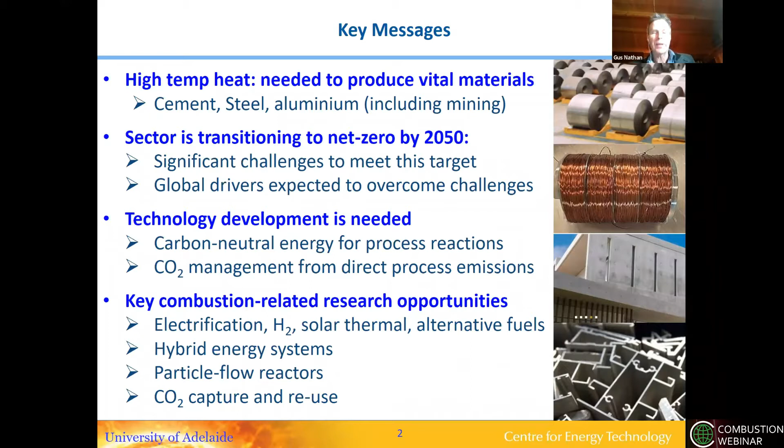So a bit about some of the global drivers. This is a recent report from the International Energy Agency showing the global share of different key sectors in global CO2 over the next 50 odd years. The electricity sector is broadly anticipated to decarbonise first, then the transport sector, shown in orange, next.

Industry processes are anticipated to be the slowest to decarbonise for a whole host of reasons, including being capital intensive and trade exposed, but also because there aren't clear commercial technologies available on the horizon yet, well demonstrated. This illustrates that 32% corresponds to the industrial sector, and of that, about three quarters of the demand is for heat.

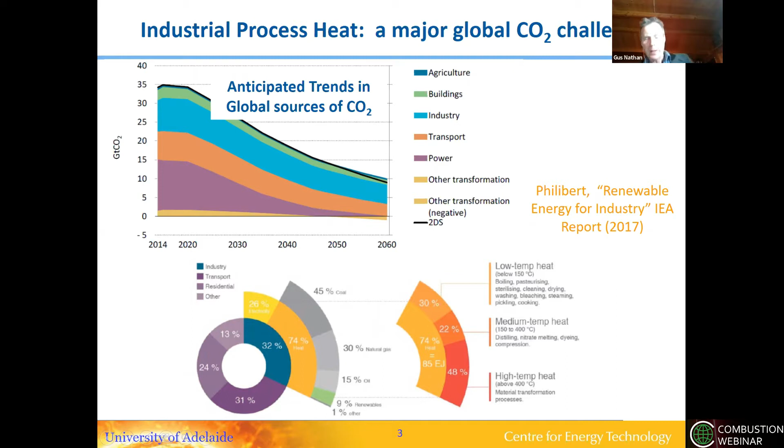Of that heat demand, about half is high temperature and half medium to low temperature. There are a number of other studies, including a different one published in Science, showing some of the key sectors attributed as being difficult to abate. These include things like iron and steel and cement, as well as other widely studied areas such as aviation fuels and the like.

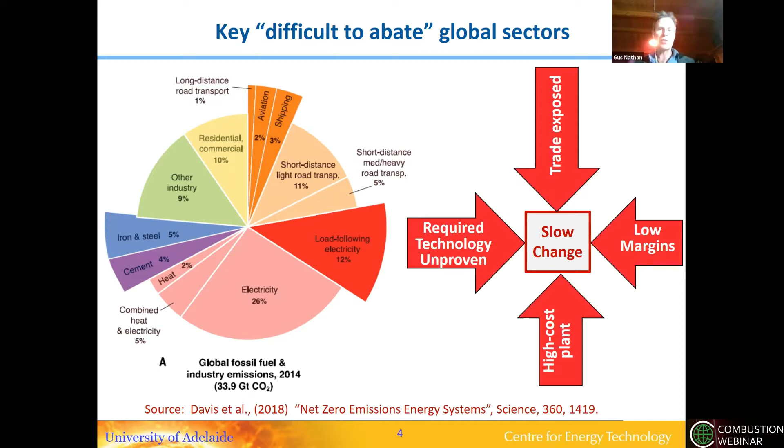Cement here is shown as being 4%, but if you include lime as an industrial chemical, this is often buried in many of these other processes. Overall, some studies put it between 7% or so, and iron and steel as much as 7 or 8%, depending on which studies you look at. These are some of the reasons why they're considered difficult to abate: the technology is currently unproven, low margins, high cost plant with long life so slow to change, as well as being trade exposed industries.

The cost of the change is also quite large in terms of the cost of that commodity in its own right. But despite that, the cost of the change compared to the final product is anticipated to be relatively small, and this is fundamentally the driver.

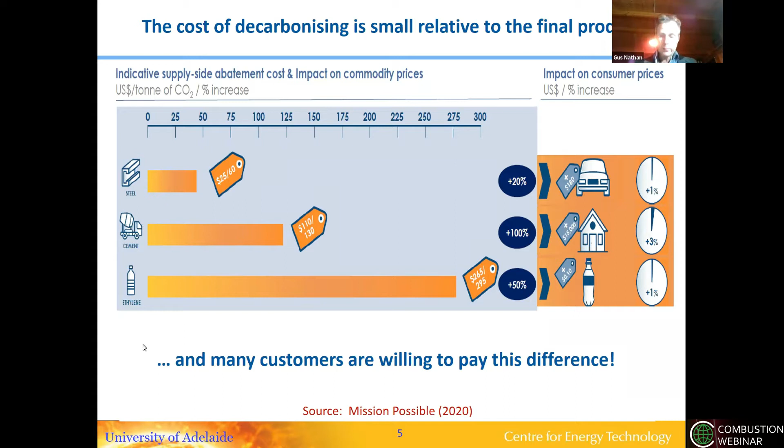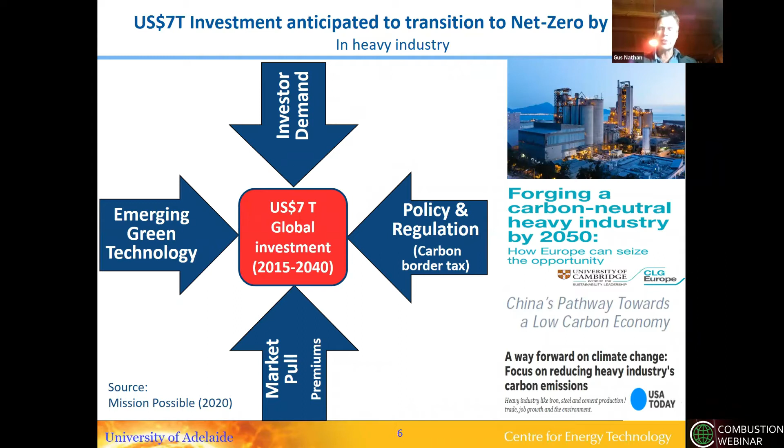Some studies, such as this Mission Possible study recently, estimate there'll be something like a $7 trillion investment in this heavy industry sector in the transition to net zero. This will be driving new technology development, which is very relevant to the kind of research many of us in the combustion community have been doing for many years, albeit with some differences.

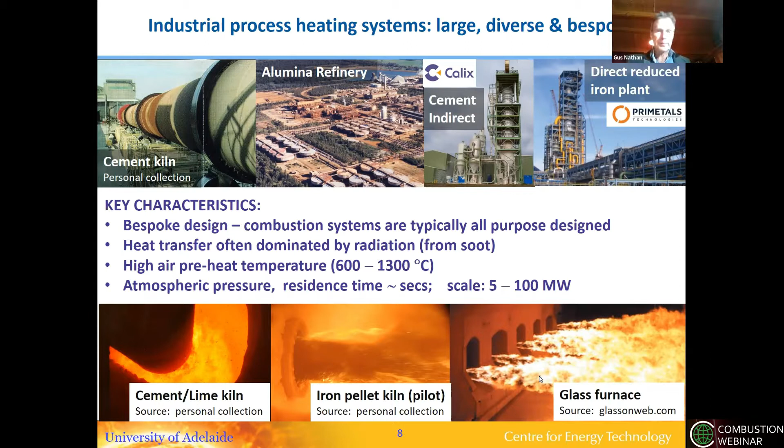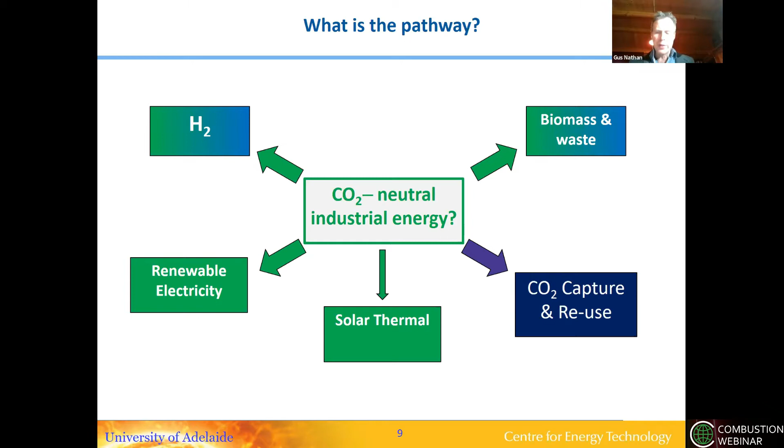This leads to the question people raise: which pathway do we think it will be? Will it be hydrogen, renewable electricity, CO2 capture and reuse, biomass and waste, or solar thermal? Or maybe it'll be a mix of these different processes. Our view is that it probably will be a mix of these systems. Probably biomass and waste will play a niche role - obviously waste is already playing a role in things like cement, but there are limited amounts of that resource, and they probably will have other competing requirements. So we think it's probably going to be a mix of these other systems that will play the biggest contribution into these heavy industrial sectors.

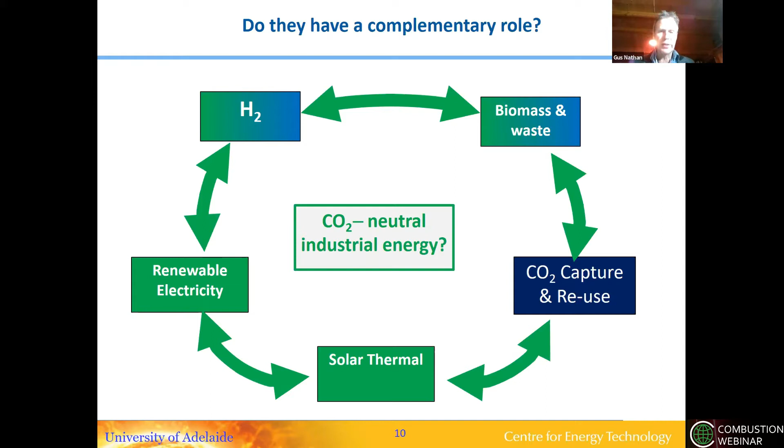One of the key things about these processes is that in addition to the need for heat, there's also a need for a chemical for the reductant process. As engineers, we're aware that iron oxide is an oxide, and the reduction reaction requires a chemical which in a conventional blast furnace is provided by carbon monoxide, which then converts to CO2 in reducing the oxide from the ore. So reduction by hydrogen has been demonstrated in the lab, and the process is very well known.

Some industrial processes already use something like two-thirds hydrogen made by, for example, reforming of natural gas. So hydrogen is already a significant component, but it hasn't been demonstrated with a nearly pure hydrogen product yet, although these kinds of demonstrations at commercial scale are now on their way. But also in the iron process, steels are typically carbon steels, so some carbon monoxide is likely to be needed - although in the longer term, this is probably going to come from something like regenerated CO2 rather than fossil sources if we want to make our products net zero.

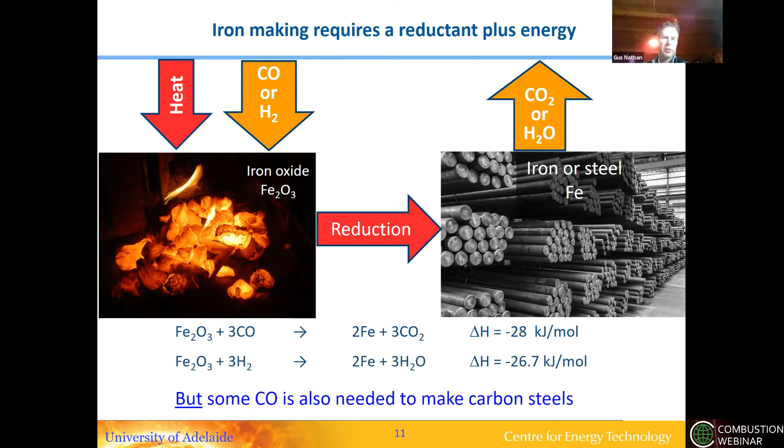This is an example of some of the different processes. The commercial process dominating the industry today is the blast furnace together with the basic oxygen furnace. This typically burns coal, which is converted to coke, and the iron ore is first pelletized through a sinter-type process - so there are different pellet kilns as part of the process. This, of course, leads to CO2, which is a dominant component. But these blast furnaces typically have a life of more than 20 years once they're relined, so there's a long history.

Obviously, one option is to try and produce the pellets carbon neutral as part of that step. But one of the other processes - this is the one I referred to - is direct reduced iron with an electric arc furnace. This also uses the pellet process, but then it goes into some kind of furnace, perhaps a shaft furnace typically. This kind of process currently has commercial versions using natural gas, which generates about two-thirds hydrogen anyway, in terms of the fuel that goes into the reduction furnace.

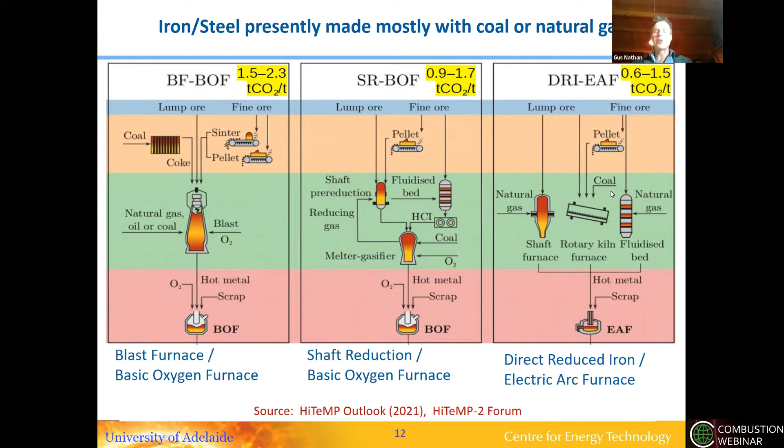This process is not too far from being commercially converted to operate with pure hydrogen, and industry is well on the way towards that pathway. But there are many other opportunities in this process, including how we're going to get the cost of hydrogen down.

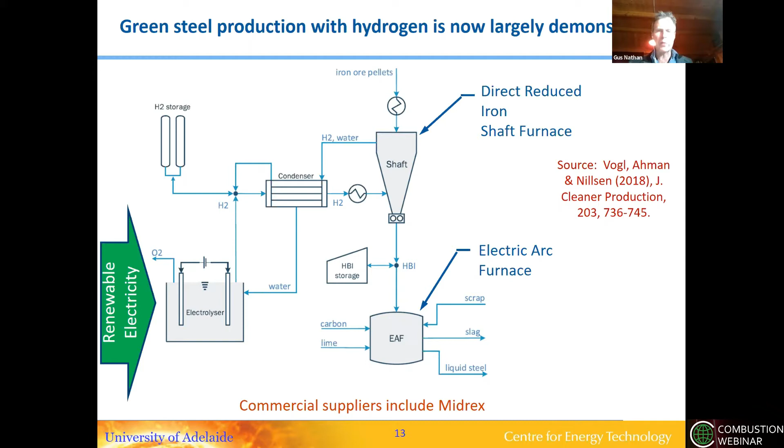This is the direct reduced iron furnace process, which potentially could be produced with low carbon hydrogen from renewable electricity, or maybe through some other route such as natural gas pyrolysis. This process with syngas is already commercial and is on the pathway to operating with predominantly hydrogen. So there are various studies saying what we think the break-even price for hydrogen would be when it would start to compete with coke.

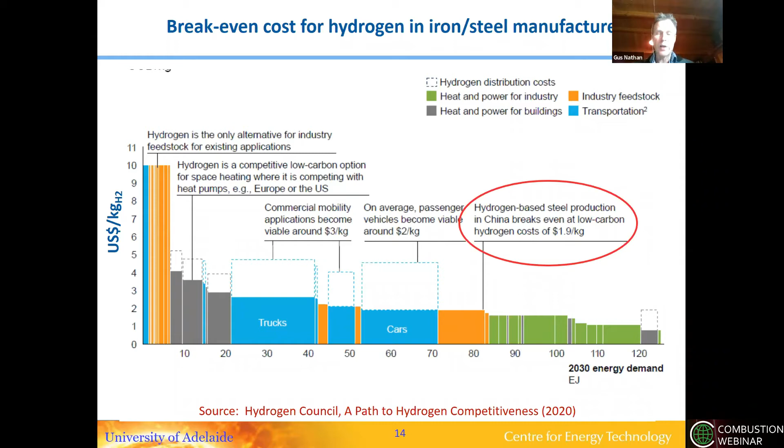It's typically expected that somewhere around US $2 a kilo is where it would start to make commercial sense without any additional subsidy. This is driving the trajectory to develop low carbon technologies. This is one of the drivers for low carbon hydrogen, and why the $2 target is widely put forward.

Of course, the various hydrogen technologies, as with all technologies, are on a learning curve to lower cost, and there are various people predicting that $2 per kilo is on its way with commercial systems. However, there are also other technologies being developed to try and bring those costs down.

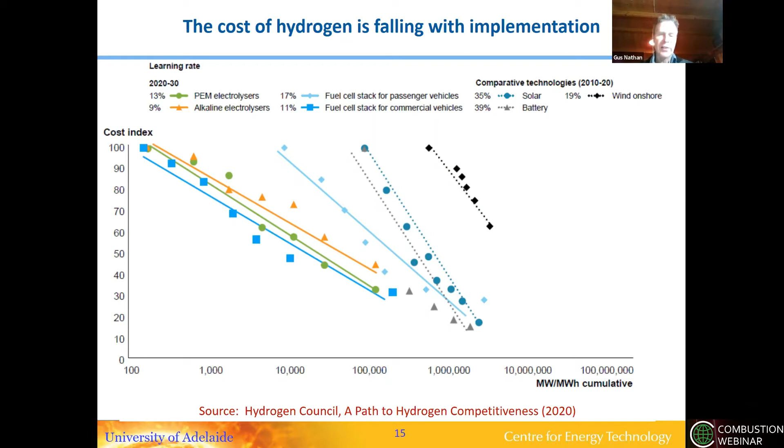Even cost is not the only indicator, because it's not just the cost of production - these processes run continuously. So the cost of storage and delivering a sustainable constant flow of hydrogen is also part of the challenge. Exactly how that is going to happen is still one of the challenges being developed.

So just recapping the main points I've been trying to make thus far. Firstly, the heavy industry sector is vital to national and global economies. For Australia, it's twice as big as our energy exports and triple the value of agriculture and livestock, but it's important around the world for all of our commodities.

The cost of decarbonising is significant, but it's affordable because when incorporated into the cost of a final product, it only adds a few percent, and this is typically what's driving this transition. We think market pull and policy is more than enough to overcome this relatively small cost in the final product, even though it's a very big cost for the individual component in the supply chain.

This will also cause a lot of changes in global supply chains. It'll change where some of the low carbon processes are being done. But I won't talk about that too much in this seminar - we can discuss it in the discussion time if people are interested.

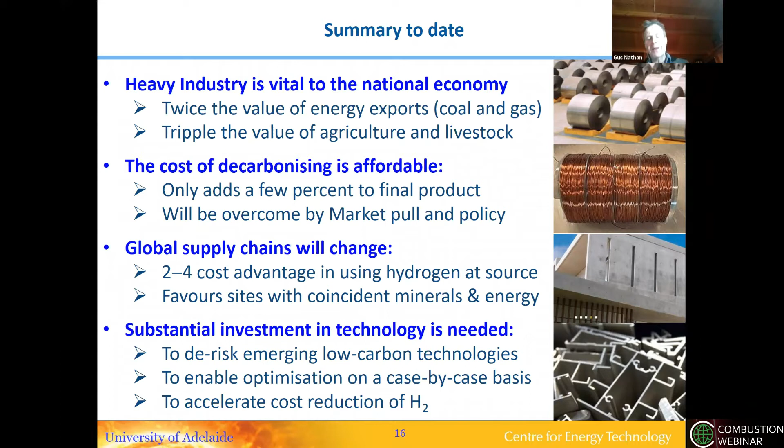The key point from the research perspective is that we think substantial investment in technology is needed to transition these technologies, and since the technologies are quite bespoke, there's a lot of highly skilled understanding needed, and opportunities to lower cost and bring more cost competitive technologies into this mix, including cost reduction of hydrogen, which is important in iron making but could also contribute to many industrial processes as process heat.

At our university, we have quite a lot of activities into low carbon hydrogen production systems, including photocatalysis - Greg Metha is the driver of that one. I don't work on it myself, although we could be working on some hybrid options down the track.

Some of the ones I'm also involved in - we have a vortex reactor which can be used for collecting solar thermal energy with particle systems, but also potentially can be adapted as a low carbon reactor. Methane pyrolysis - I'm going to say a bit about work with bubbling media, molten media, and also we do quite a bit of work on solar gasification, although I won't talk much about that today.

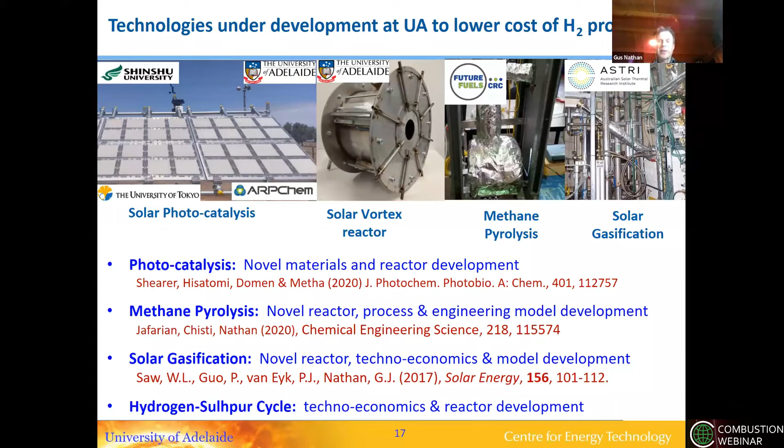One of the drivers for people interested around the world is a growing interest in the pyrolysis of natural gas. In these typical processes, gasification is well understood. However, biomass is a limited resource, and it's typically thought there are many competing opportunities to use biomass, so it's probably not going to play a major role in hydrogen, although it has other benefits.

Steam methane reforming is obviously the commercial route to hydrogen, but it comes with a CO2 penalty, and also still quite a significant amount of energy is needed to produce it.

On the other hand, the pyrolysis of natural gas is directly cracking the CH4 into solid carbon and hydrogen. This requires much less enthalpy, only about a third of the enthalpy needed for steam methane reforming, so only about 10% of the net energy content of the fuel is needed for this production process.

So this chemistry is also quite relevant to some of the soot in combustion research. It's also aligned with that side of what we've been involved in the past.

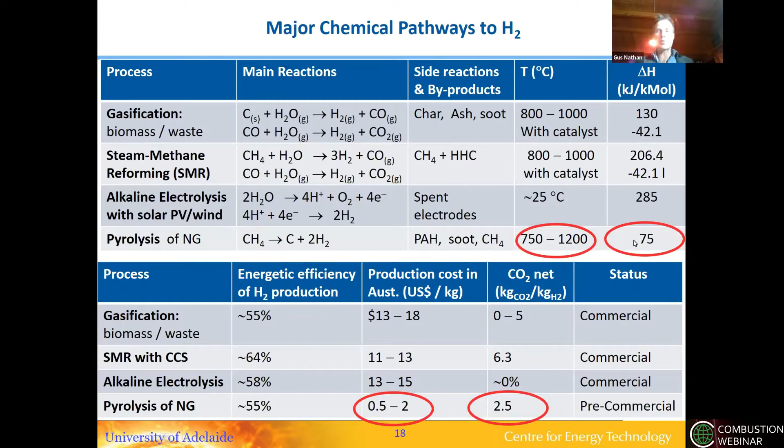The other point is that the temperature of this reaction is typically, depending on the conditions, between 750 and 1200 C, depending on the catalyst etc. This temperature is compatible with some of the emerging high temperature concentrating solar thermal technologies. And because only about 10% of the net energy of the fuel is required, this potentially is one of the renewable forms of heat that could drive this endothermic reaction, because it's relatively small and the temperature is potentially compatible with this solar thermal.

Some of the technologies under development include a falling particle curtain technology. Sandia National Lab is working on that. Then there's an international collaboration, of which we're also contributing, in Adelaide, looking at this particle system. This is basically a curtain of particles falling through the focal point of a solar tower, which then heats the particles to high temperatures, and the particles become a storage media.

Traditionally, this stored heat has been conceived as going into some kind of turbine for power generation. But of course, the energy can potentially be used directly in some thermochemical plants, which would increase the efficiency of the solar thermal energy by a factor of about 3. And of course, historically, heat has been much cheaper than electricity, because electricity is being made from heat.

However, maybe we're moving into a world where, at least for parts of the temporal cycle, the equation can be turned around, because maybe electricity may be cheaper than heat. This is some of the drivers for potentially using solar thermal in these kinds of processes.

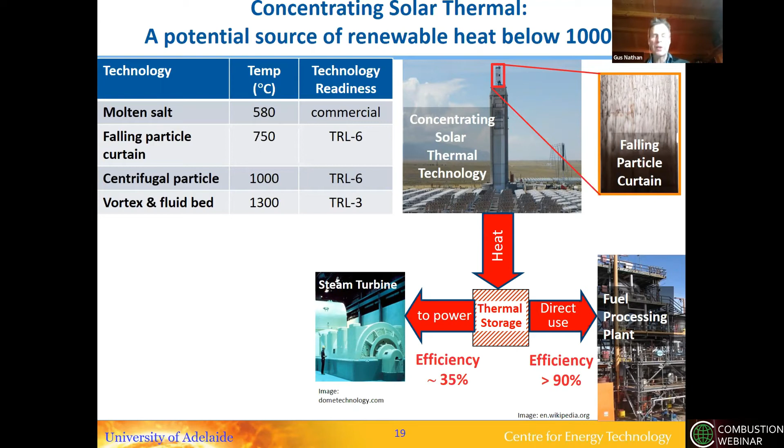So let's try to move this in here.

Some of the potential opportunities and challenges for combining these two technologies together is that if the solar thermal energy was used to drive this methane pyrolysis, this would eliminate direct CO2 emissions.

If the carbon has a useful product, then this would also displace fossil fuels for things like potentially plastics and tyres. Then the low cost of potentially this can generate low cost hydrogen, at least to some scale, because of the co-production of a valuable carbon-based product, and also a relatively low cost route to renewable heat, because CST is potentially a relatively low cost form of stored heat. And the scale and temperatures are relatively compatible.

Nevertheless, these high temperature technologies above about 600 degrees are also pre-commercial, so this means that there is also technology development needed to enable this to occur.

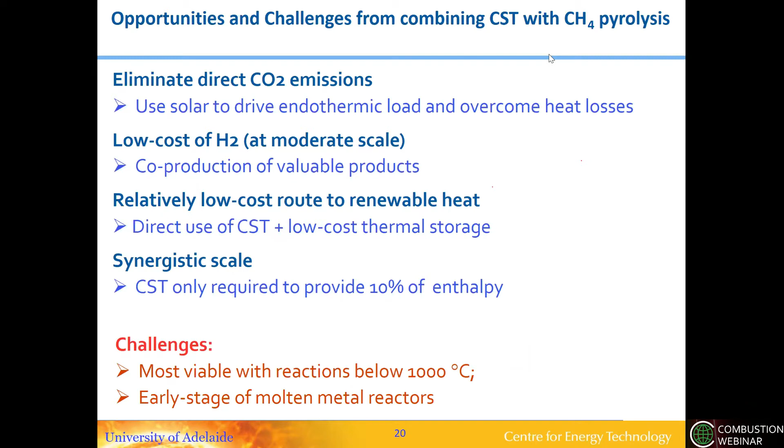But there's also growing interest in bubbling molten metal media as a catalytic reactor. Some of the opportunities of using bubbling molten metal as the reaction media are that the bubbling generates high rates of heat and mass transport in the reaction path, and the molten metals are both highly reactive and have catalytic properties.

Unlike solid catalysts, if carbon is generated on a solid catalyst it will tend to coke the catalyst. But if it's generated in a molten bath, it tends to float to the top, so the surface of the catalyst doesn't get deactivated, and hence it becomes continuously replenished, at least the surface.

On the other hand, there are challenges, including safe containment of a hot molten metal, and also the thermal management—how the energy is going to be converted into this reactive media. There's also really very limited data on this, because it's not very easy to perform measurements inside a molten metal bath.

So the work that's been done to date typically involves reactions at temperatures above about 1,000 degrees. One of the things we've been working on is to try and take the temperature below 1,000 degrees, which will reduce the containment challenges, because it means the reactor can be contained within more conventional metallic materials, albeit potentially with some lining, but it's much safer. It's also more compatible with solar thermal temperatures.

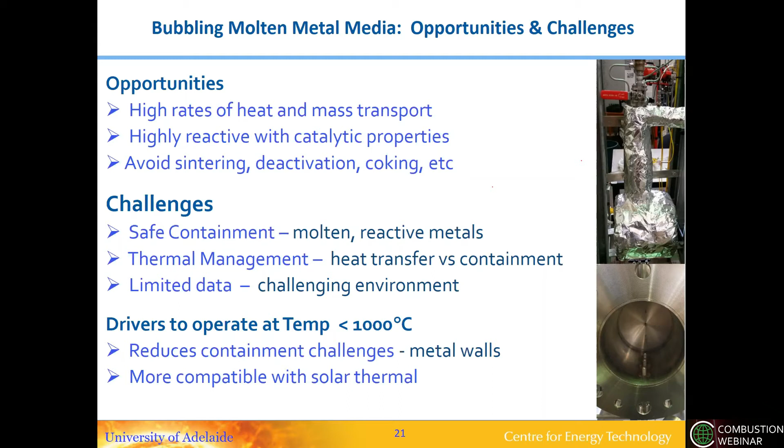So these are some of the reactors in our laboratory that we've been developing. We're working with a large number of collaborators in this area, and of course there are quite a number of people around the world now working on this topic and have been doing for some time. Our work spans some of the reactor development, storage, chemical looping, etc. But I guess our main focus is overall on the reactor side.

We're also beginning to look at developing some of the laser diagnostic methods that have been applied to soot in some of these pyrolysis environments. We haven't yet performed any measurements in that media, but that is the direction we're moving toward.

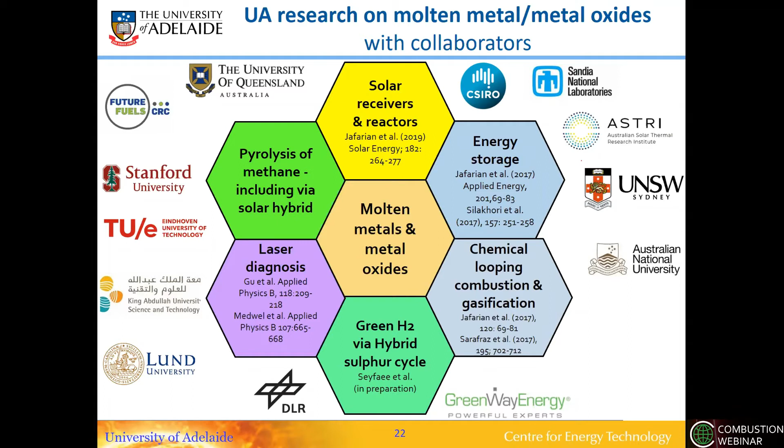So one example of work we have performed is demonstrating gasification of graphite in a molten metal. This shows that, much as a gasification reaction can occur under other conditions in other reacting environments, the temperature is relatively modest at about 900 degrees, which is lower than some reactor environments because of the high reactivity of the metal.

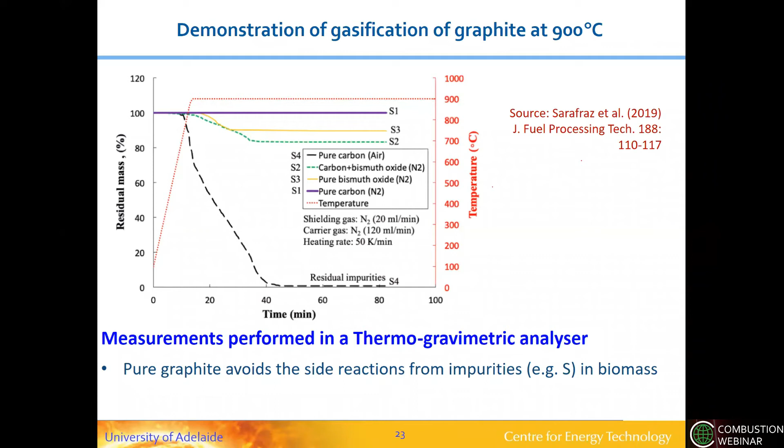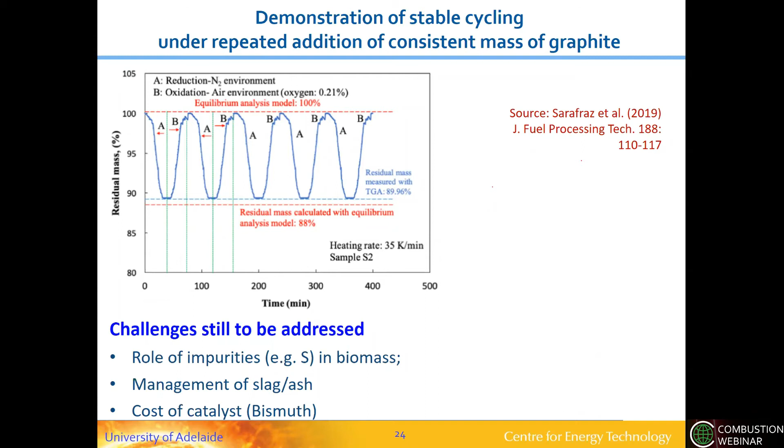Graphite was chosen to avoid some of the challenges of things like biomass and waste, which can have other complex components, but we were interested in the principle here. We think there's probably a number of limitations to this process because of the availability of carbon sources, so we're more focused on other media, but showing that the reaction can cycle through this molten metal media stably.

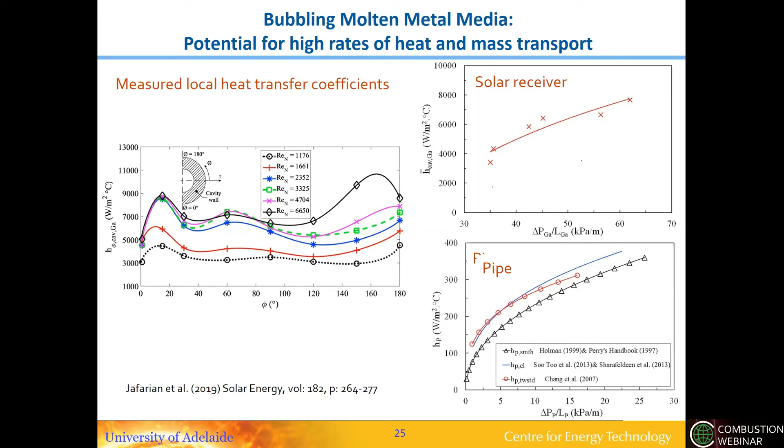We have also been doing work on molten metal as a solar receiver heat transfer media, again showing very high rates of heat and mass transport in these kinds of systems. The principles are well known, but most work has been done on bubbling reactors with different media other than metals.

Effectively, there are two reactors—in this case they're not reactors, they're inert because it's in liquid. But at higher temperature, you would have two reaction media, maybe a molten metal at two oxidative states, and then the media from one goes from the top of one reactor to the bottom of the other and back again. This is pneumatically circulated, which is not such an issue with an ambient system in water, but at high temperature there are a limited number of pumps that typically only operate up to modest temperatures with molten metals.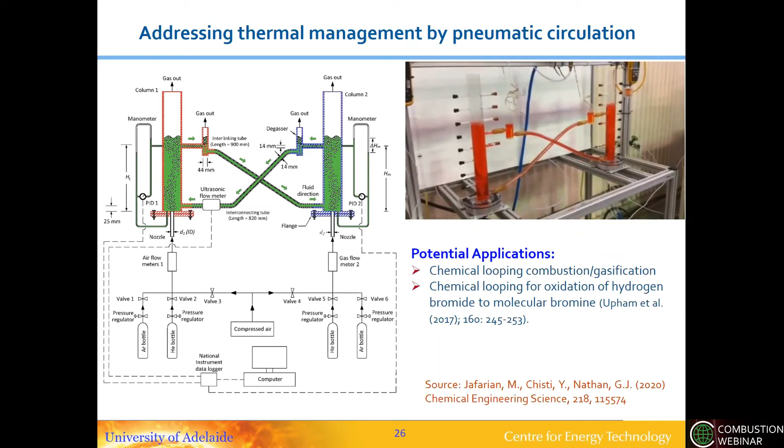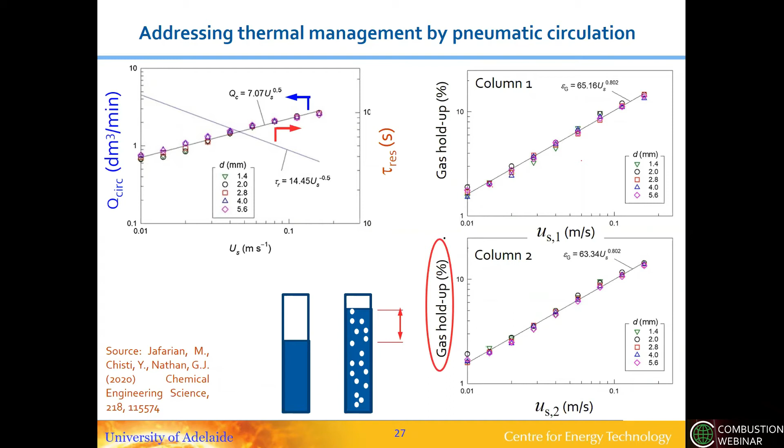To assist in the engineering tools and eventually in the design. This particular configuration is not such a practical device, but it's demonstrating the principle of pneumatic circulation. We're also working on more practical devices that I won't have time to talk about today. This illustrates some of the dimensionless parameters used to characterize the circulation of the fluid through these media, and there are of course a wide range of different reaction pathways that can be pursued, including methane pyrolysis work that I mentioned.

So briefly, this is just a snapshot of the work, but the key point on the hydrogen production side is that there are many drivers around the world to lower the cost, even though the cost of green hydrogen is going to come down to some extent by the upscaling of commercial type electrolysis production. Nevertheless, there are other drivers for other systems as well, particularly to look at continuous supply and accelerate large scale for industrial type processes. There are a suite of thermochemical pathways that could potentially contribute to these systems, including pyrolysis and gasification.

And reforming. People are also looking at things like solar reforming, and there are also hybrid processes, including high temperature electrolysis. So there are many thermal opportunities for contributing to potential new pathways into hydrogen production.

On molten metal catalysis itself, this is also an emerging field with applications beyond hydrogen production. We mentioned some of the potential advantages of avoiding degradation of the catalyst and the high rates of mixing. But there are also challenges, and they need to be better understood, with better measurements, etc., before these can become commercial as a reactor.

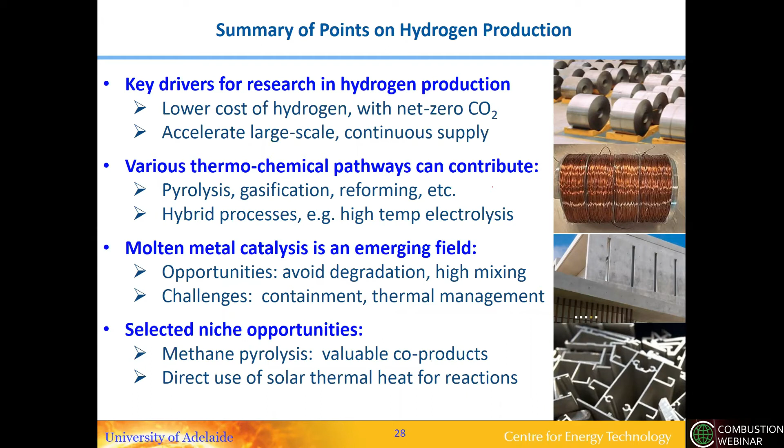Moving beyond the hydrogen part of the cycle, in industrial processes, another component is CO2 capture and reuse, illustrated by this diagram of some of the basic chemistry. Limestone is calcium carbonate, and the conversion of limestone to calcium oxide, which is the core component of concrete, but also this is lime, which is also used as an industrial chemical.

This doesn't need a reductant, but heat drives this chemical reaction, which directly drives out CO2 from the limestone itself. Of course, there are other carbonate ores that also may release CO2, including magnesium carbonates, etc., but the biggest one commercially used is the limestone process.

Because lime is considered to have long-term demand, although there are a number of concrete substitutes under development, there is still expected to be some ongoing demand for lime as a chemical, also because lime is used in production of the alumina process. It's used in pulp and paper making. It's an industrial chemical that's quite widely used.

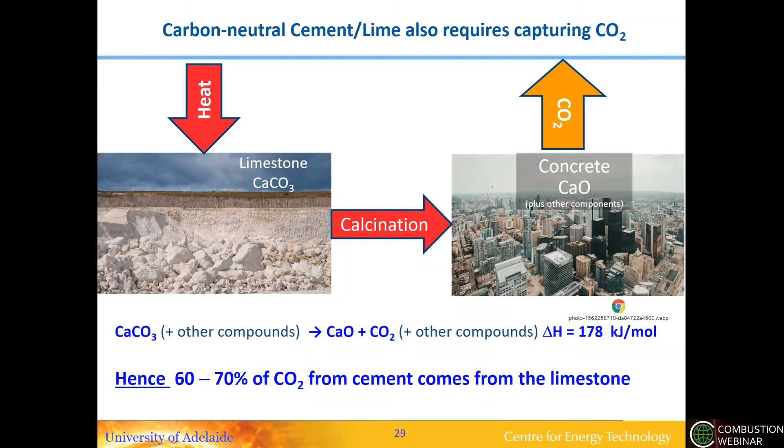So for those processes, we need to find a way to manage the CO2, and typically the route perceived as being the most commercially viable is capture and reuse. There are a number of technologies being looked at around the world. This is a cement kiln. Commercially it's a two-stage process, but simply shown here as a single reactor for the purposes of illustration.

The current process burns fuel and air together, and the calcium carbonate—that's meant to say CaO, there's a typo there—but then the CO2 from that process comes out mixed with the nitrogen from the combustion, which obviously requires some way of management.

There are of course many technologies being looked at for CO2 capture, but estimates done of simply applying commercial routes would lead to something like €80 a tonne to capture this without further developments. So there are further developments needed before this becomes economic, and the CO2 that comes out could either be put forward to sequestration or looking at a reuse option.

However, the sequestration route is not being seen as particularly attractive, largely because in many cases it might need to go through transport, possibly through residential areas, etc. So broadly, the industry seems to be mostly interested in the reuse option.

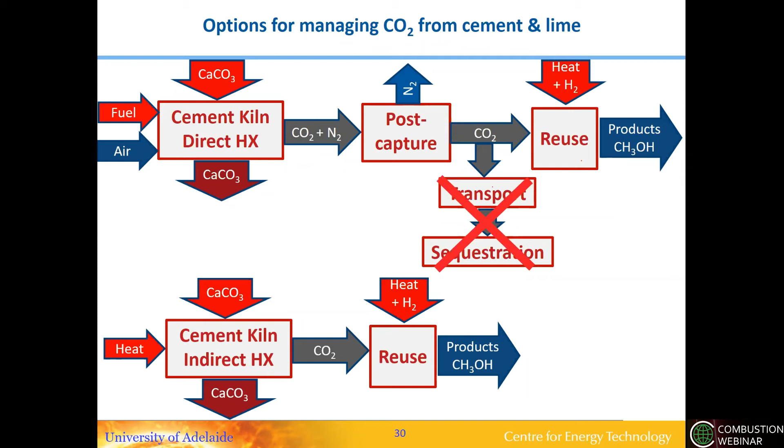This is considered by the industry we're engaged with as the most attractive path within the system towards net zero. So one of the reactors we're working with a collaborator on is from a company called Calix. This is an indirect reactor where the limestone or other material for cement is passed through a tubular reactor that is heated from the outside, and the CO2 is the only gaseous product from this process.

One of the programs we've been working on with this company is to better understand the dynamics of this calcination process in this reactor. I'll tell you about some of the work we've done on optical methods to enable direct, in situ measurements of particle size and distribution in this reactor.

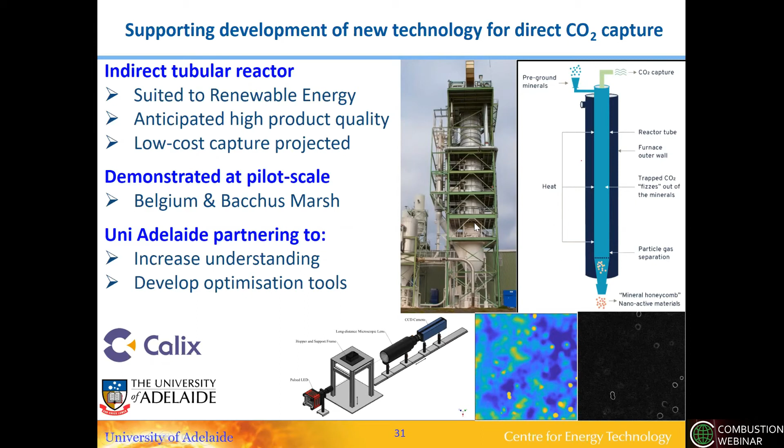Recently, I can't show you all the results because it's premature, but it will be published eventually. This gives you an idea of the size of this reactor, operating at about 1,000 degrees.

Some of the methods we've developed have recently been published in a different system, which is a backlighted optical method using pulsed LEDs.

Effectively, a backlight is put on one side of the particle system you want to measure, and on the other side, a long-distance microscopic lens. Ziwei Sun from our team has done most of the work driving this technique development.

Here we're showing it demonstrated on a falling curtain of particles, which is also related to the solar concentrator work I mentioned earlier. In this case, the particles are carbo particles of about 150 microns in diameter.

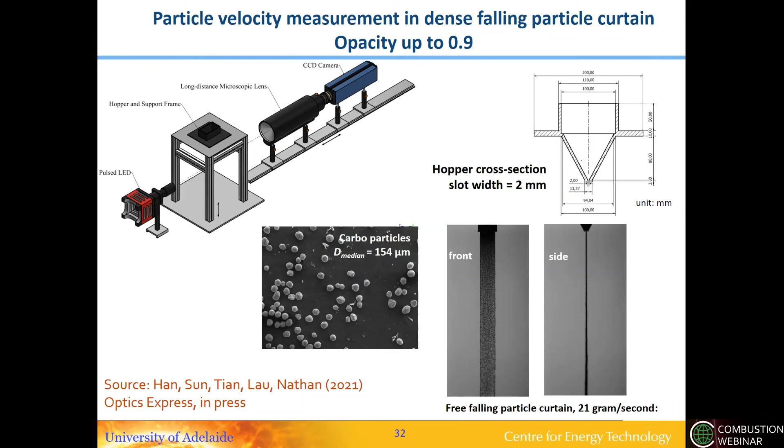This curtain is a two-dimensional slot, in this case about 2 millimeters thick, although we're also now applying it to significantly thicker curtains. As the light passes through this system, there's sufficient signal even though there's a lot of attenuation. In fact, in some cases the opacity of this system is higher than 90%, and even significantly higher than that.

As the light passes through, the key optical component used to give discrimination in the line of sight is a long-distance microscopic lens with a very narrow depth of field. This means particles slightly in front of or behind the focal plane become blurred, and by doing gradient processing of the image, you can remove particles that are not in the focal plane.

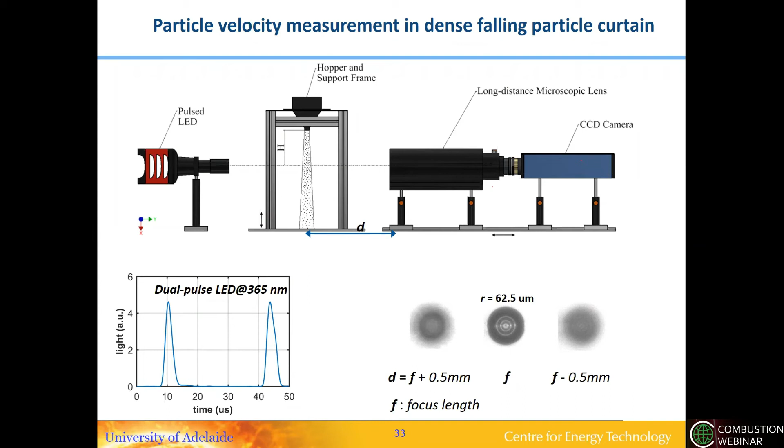This is what we've been using to perform measurements as well.

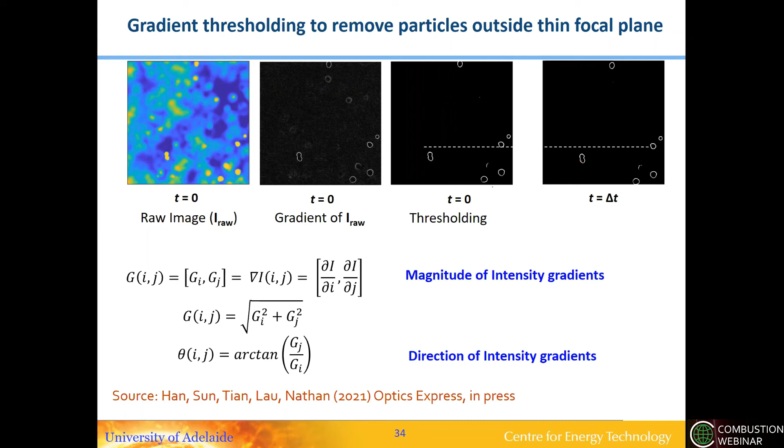And this also illustrates the depth of field, which depends on the constants used in the algorithm. It shows that the focal particles can be eliminated into up to plus or minus 0.3 millimeters, so the net spatial resolution in that dimension is about 0.3 millimeters.

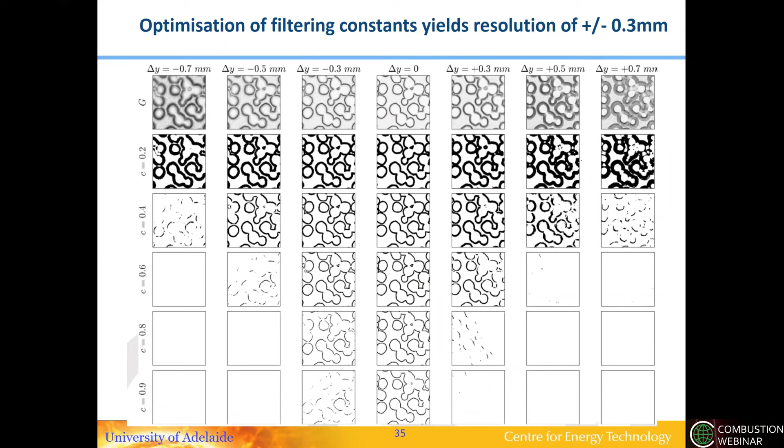This gives, showing that the first time through that curtain, we were able to measure a velocity gradient in the curtain, which hadn't been done before because of the very high dense loading of those particles, which makes other measurement methods difficult.

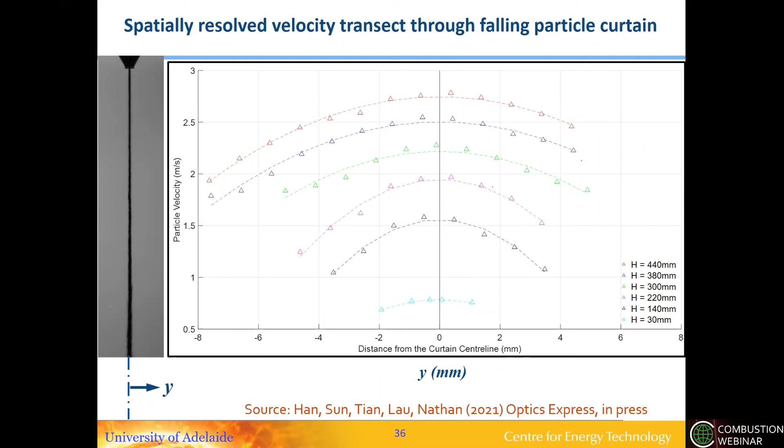Then we also did some measurements in that reactor, but I won't go into those in detail. One of the other measurement methods we've been developing to assist with measurements in these particle flow reactors is a method to give optically distinct detection of both a tracer phase and a particle phase.

So here we did it for research using a polymer. PMMA is a polymer particle which is spherical, and the BAM tracer, which is typically used for phosphothermometry. These two methods together can be driven at the same wavelength but emit at different time scales and also different wavelengths, which allows them to be discriminated optically.

This work has also recently been submitted for publication, and this is an example of the kind of methods that are needed to give better understanding of these new reactors, which will be needed for part of this low carbon transition.

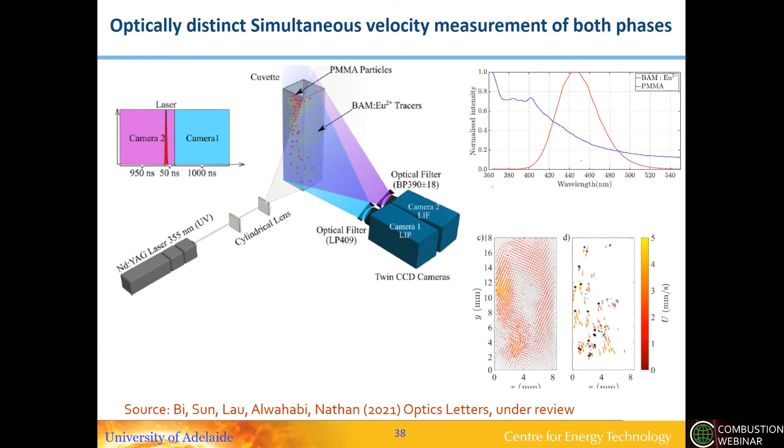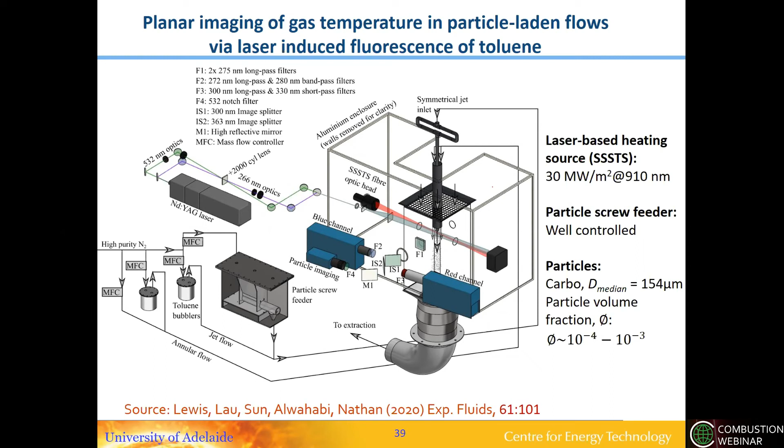So obviously we're also doing other work in particle-based flows, including the detection of gas phase temperature and particle phase temperature, but this work has been published previously, so I'm not going to talk about it much now unless some of you are interested.

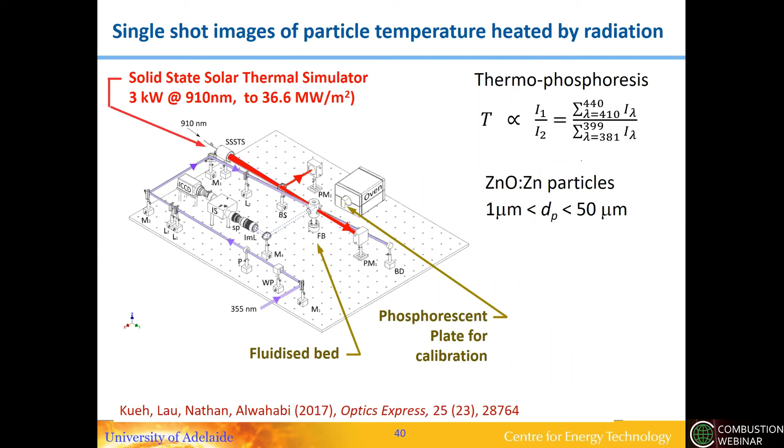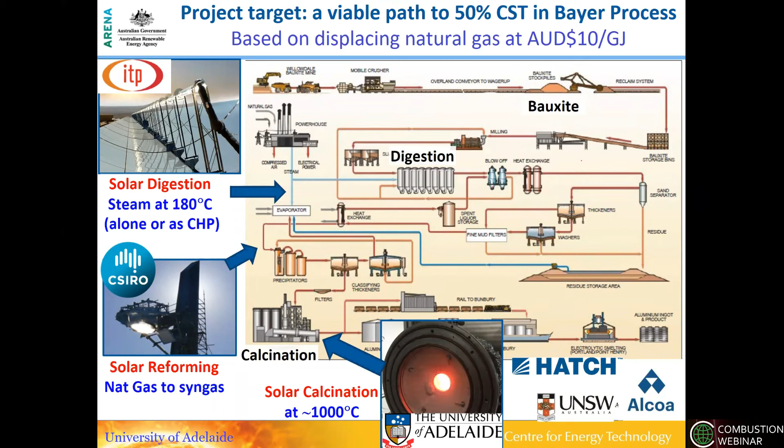We're also doing work on an alumina process in a program with a number of partners, including Alcoa and Hatch, and the government lab CSIRO and University of New South Wales. I'm not going to talk about that in this work, but it's another example of how the reactors themselves, the way in which they're operated, will need to change if we're going to make cost-effective carbon neutral processing. But we can maybe pick up some of these in the discussion time if people are interested.

So the final comments before I throw this brief presentation over for discussion is that we consider the low carbon transition for industry by 2050 is well and truly underway. It's driven by global commitments, investor demand, and new markets, but it is a long transition. It's not going to happen overnight because of the large bespoke nature of the industry and because of the need for new technology.

The new technology is needed because commercially viable technologies for net zero products are still in their infancy. You can't buy green steel on the market. You can't buy carbon neutral aluminium, although you can buy low carbon aluminium, for example. So there's obviously a lot of need for cost reduction, increased reliability and optimization, bearing in mind particularly that each process is tailored for the particular ore.

So there's a good need for reliable modeling tools, predictive capability, and cost reduction. And these are very similar tools to what are widely used in combustion processes, even though the applications may be slightly different in these other types of high temperature processes.

But also in terms of the heating source, there's a range of new technologies being developed, including thermal plasmas, radiators, etc., for electrification, alternative fuels, hydrogen, biomass waste streams, etc. Solar thermal may play a role in the direct use, as well as CO2 capture and reuse. And of course, the reuse of CO2 also brings in thermochemical pathways.

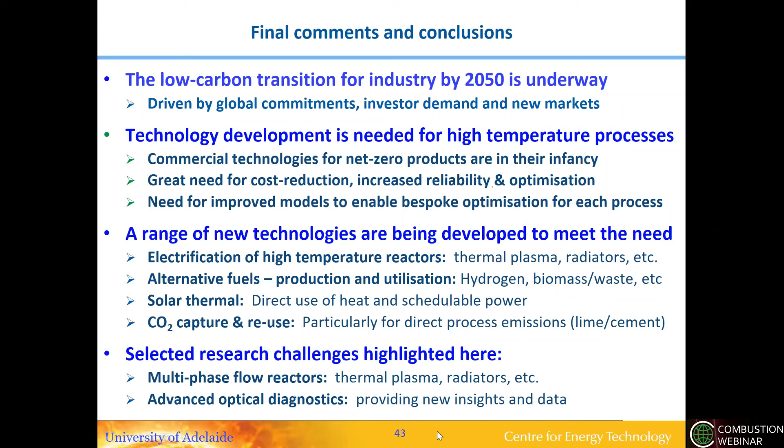So here I've just given a brief taste of some of the research challenges, but we're certainly happy to discuss them, and hopefully it'll generate some new ideas for potential collaborations. We're certainly interested, but it may also spark some ideas amongst the community, and hopefully that might be the case. So I'm going to stop the presentation and look forward to some discussion. Thank you.

Thanks for the introduction and the seminar. It's been really quite interesting and an eye-opener. There's a whole lot more to combustion science than just the science, of course. We do have some questions from the audience, so I'll just go through them one at a time here.

The first is from Todd Fonsler—Fonsler, I hope I'm pronouncing that correctly. How carbon intensive is the production of critical materials for battery electric vehicles, such as cobalt, lithium, neodymium, etc.?

Very good question, I'm not a specialist on all of those particular processes. I'll make the point that typically, in running the high temp forum where we assess materials through an expert panel process, we found that the rarer the materials, the more the dominant part of the carbon footprint comes from the early stage processing, from mining and mineral processing, because they tend to be quite low concentrations. There's a huge amount of energy going into separating these very low concentration ores into the final product.